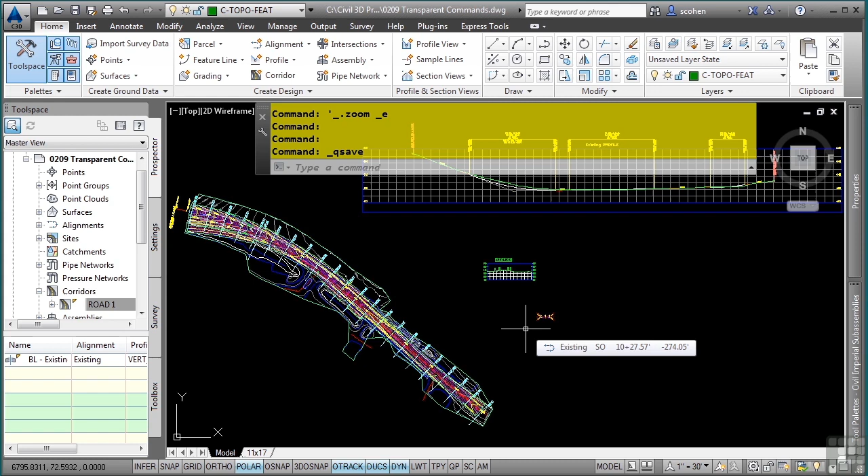So what are transparent commands? Transparent commands are commands that enable you to access your design objects while using either standard AutoCAD commands or Civil3d commands. To access the Transparent Commands toolbar, navigate to the View tab, User Interface panel, Toolbars, Civil Category, and Transparent Commands. This is a toolbar, so these tools are not in the Ribbon tab interface.

I'll go ahead and leave mine up here for the purposes of this video. If you look at the Transparent Commands toolbar, you will notice that it is categorized. We have angular type transparent commands like angle distance, bearing distance, and so on.

You have northing and easting type transparent commands, or point commands, for locating points in the drawing. You have alignment commands for locating the station and offset of an alignment. You have profile transparent commands that allow you to easily create profiles using commands like distance grade, profile grade station, and so on.

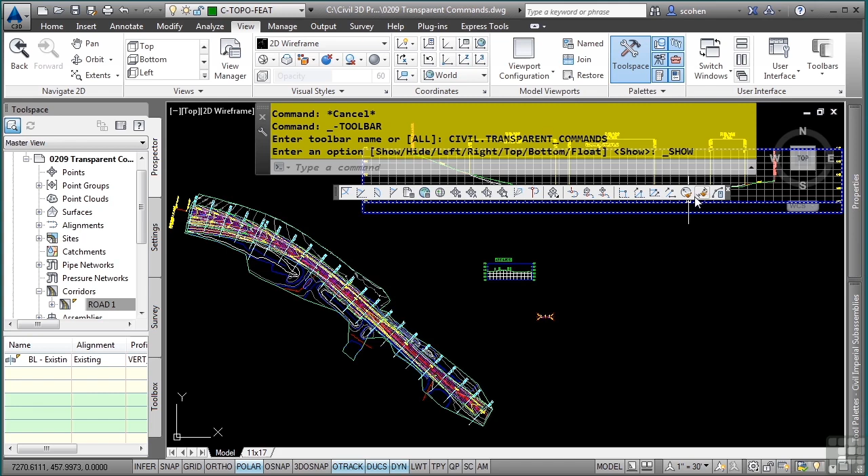And lastly, we have the match radius, match length, and so on commands, which will match existing AutoCAD or Civil3d objects and apply them to proposed objects. So how do you use transparent commands?

Let's say, for example, I would like to create a polyline and I want to use the alignment to define station and offset values to create this polyline. First, I will start the polyline command. The way that transparent commands work is they work while you're in the middle of a command.

Now I will access the station offset transparent command. Note that you can also type in 'SO to quickly access the station offset transparent command. Notice the prompts: it says SO, and then you have these two greater-than symbols that say select alignment. When you see those two greater-than symbols, you know that you are still in the transparent command. Those are visual cues that tell you that.

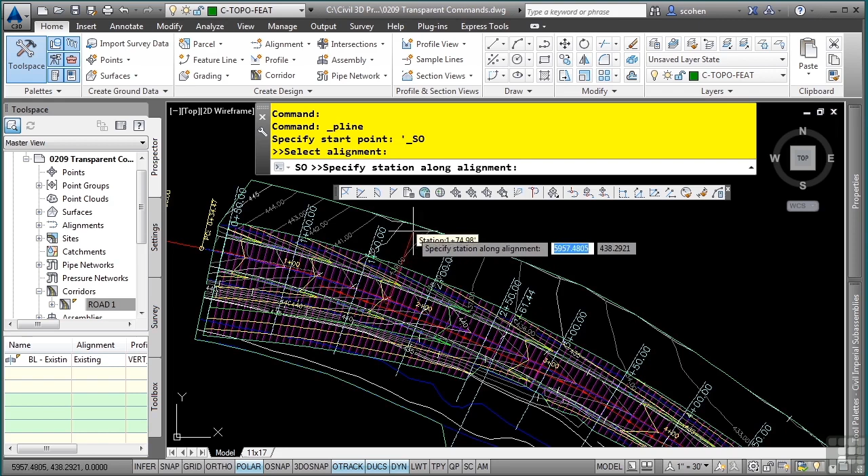I'll select my alignment, and then it says specify station along alignment. Notice how you get this alignment jig that allows me to snap to existing AutoCAD objects if I so desire. In this case, I want to type in my stationing. I'll type in 110, enter. Notice how the jig locks into the 110 station value, and now you are prompted to define an offset.

If you would like to go left of the alignment, start the value with a negative number. If you want to go right of the alignment, start the value with a positive number. I want to type in -45, and there's my first point. The line has not appeared yet because I only have one point created, but notice that there is a little plus sign signifying that I have started the polyline command.

Let's go ahead and keep going here. Again, notice the two greater-than symbols that tell me I am in the middle of a transparent command. I'll type in 2 plus 00, or 200, and then type in my offset of -52.5, enter. Notice how my polyline is beginning to draft.

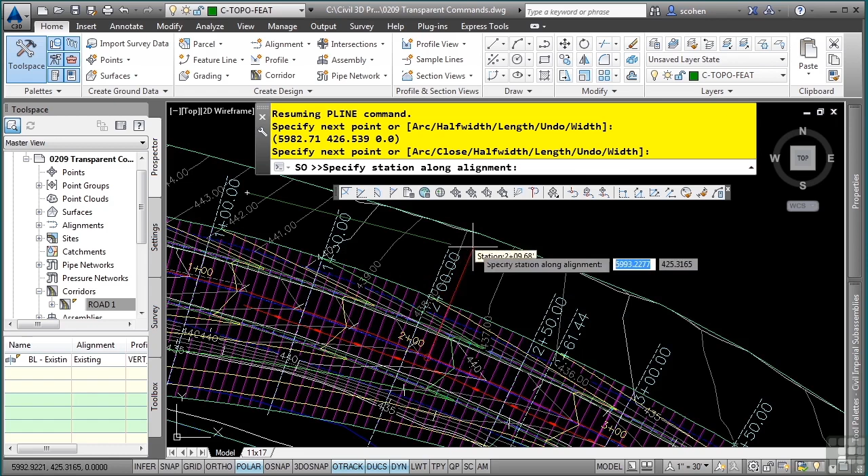If that was it for using the transparent commands along with the polyline command, I could simply press escape once on the keyboard. That puts me back into the polyline command and I can continue drafting. If I so desire to use one of the transparent commands again, I can simply access them through the Transparent Commands toolbar or type in the shortcut key associated to it, in this case, 'SO.

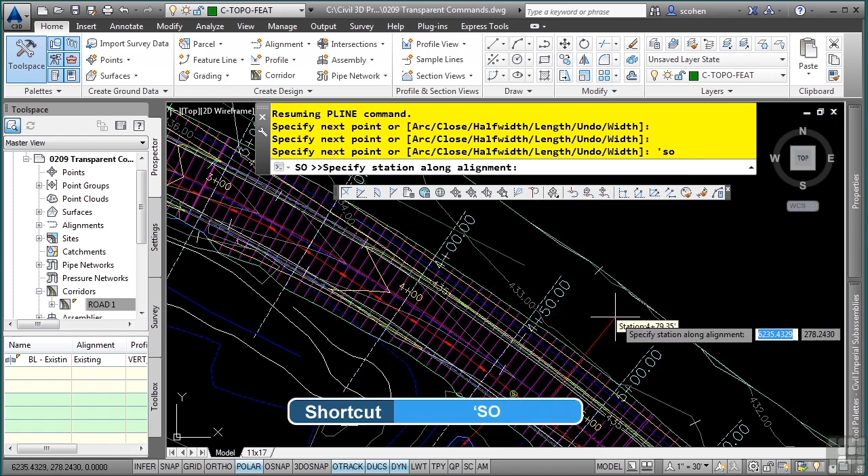I'll now type in my alignment. Notice how AutoCAD Civil3d automatically knows the last alignment that you selected, and then I'll type in my value for the offset. Let's say I wanted to draw this polyline across the road. I'll enter 5 plus 00, and then I'll just type in a positive value of what I typed in before. Notice how the command continues all the way across the road.

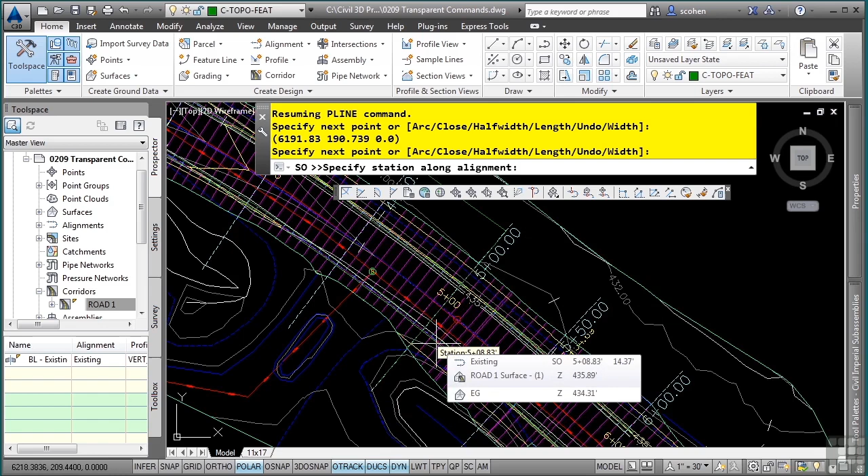This command is very useful for designing many standard AutoCAD objects, as well as using it for Civil3d object design. I'll press escape to resume my polyline command, and if I am done, I can press escape again to end the command. That is the standard procedure for using transparent commands. This concludes this video discussing the transparent commands.